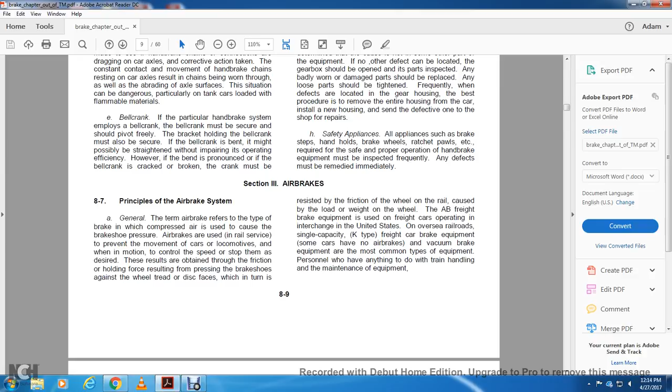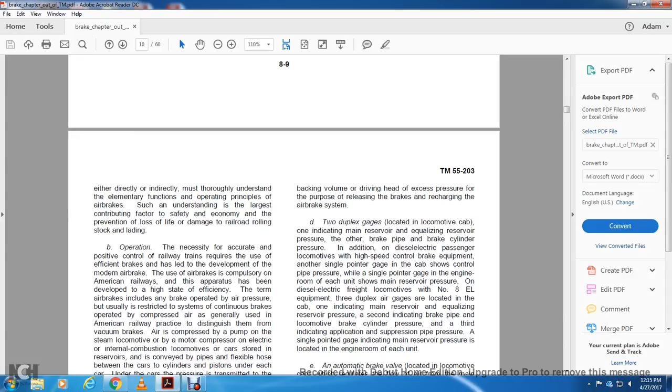Personnel who have anything to do with train handling or maintenance of the equipment, either directly or indirectly, must thoroughly understand the elementary functions and operating principles of air brakes, such understanding being the largest contribution to safety and economy, and the prevention of loss and damage to the railroad rolling stock and lading.

Operation. The necessity of accurate positive control of the railway train requires the use of efficient brakes, and has led to the development of the modern air brake. The use of air brakes is compulsory on American railways, and the apparatus has been developed to a high state of efficiency.

The term air brake includes any brake operated with air pressure, usually restricted to the continuous brake operated with compressed air, generally used in American railway practice, distinguishing them from vacuum brakes. Air is compressed by the pump on the steam locomotive, or by a motor compressor on electric and internal combustion locomotives, and stored in the reservoirs.

It is conveyed by pipes and flexible hose between the cars to the cylinders and pistons under each car. Under the car, pressure is transmitted through the brake levers, hence to the brake shoes. The brakes are applied by reducing the pressure of the brake pipe below the auxiliary reservoir, such reduction caused by the engineer opening the brake pipe to the atmosphere through the brake valve, or accidentally by a hose burst

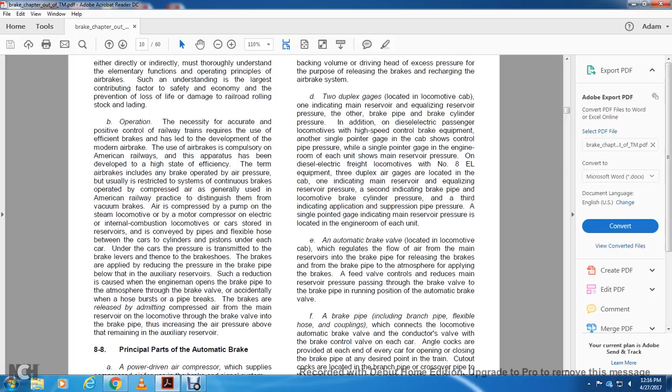of the brake pipe. The brakes are released by admitting compressed air from the main reservoir of the locomotive through the brake valve into the brake pipe, increasing the air pressure above the remaining auxiliary reservoir pressure.

8-8 Principal parts of the automatic brake. Power-driven air compressor, which supplies the compressed air for the use of the brake and signal system. The governor, which controls the compressor operation and regulates the air pressure maintained in the main reservoir.

The main reservoir serves three purposes: to receive and store compressed air, to act as a cooling chamber for the compressed air and catch basin for moisture and oil, which is passed from the compressor and precipitated from the air by cooling, and to act as a storage chamber for the excess pressure for operating air devices without interfering with the brake pipe pressure, to serve as a

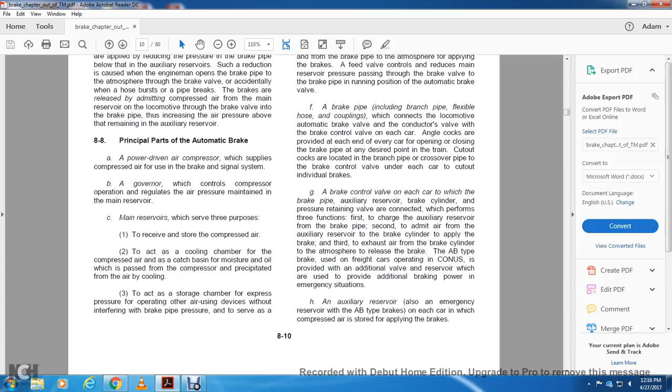backing volume with excessive pressure for the purpose of releasing the brakes and recharging the air brake system. Two duplex gauges are located in the locomotive cab, one indicating main reservoir and equalizing reservoir, and the other brake pipe and brake cylinder pressure.

In addition, with the diesel electric passenger locomotive with high-speed control brake equipment, another single-pointer gauge in the cab shows the control pipe pressure, and a single-pointer gauge in the engine room of each of the units shows the main reservoir pressure.

On diesel electric freight locomotives with the number 8 EL equipment, three duplex air gauges are located in the cab, one indicating main reservoir and equalizing reservoir pressure, and the second indicating brake pipe and locomotive brake cylinder pressure.

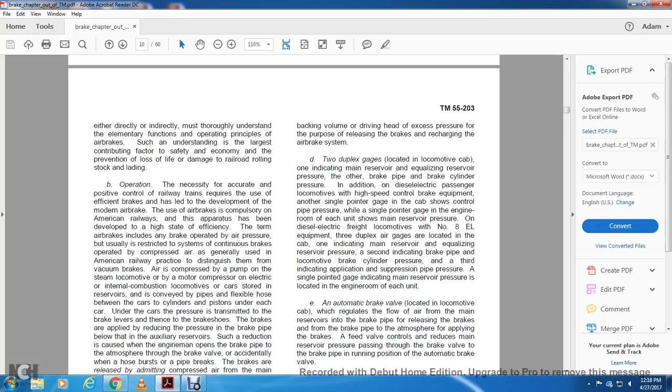The second indicating brake pipe and locomotive brake cylinder pressure. The third indicating application and suppression of brake pipe pressure. A single pointed gauge indicating main reservoir pressure is located in the engine room of each unit.

An automatic brake valve located in the locomotive cab, which regulates the flow of air from the main reservoir to the brake pipe, releasing the brakes, and from the brake pipe to atmosphere, applying the brakes. The feed valve controls the reducing of main reservoir pressure passing through the brake valve to the brake pipe in the running position. Automatic brake valve.

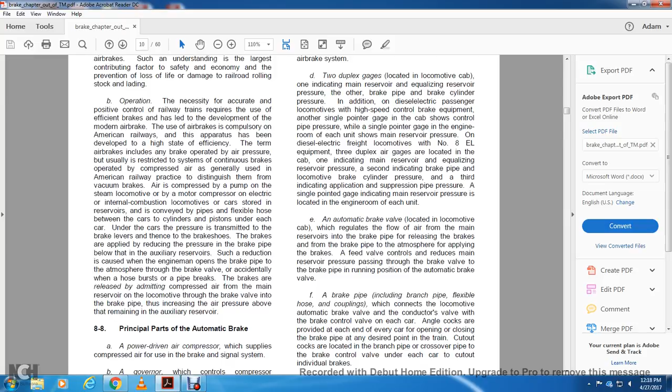F. A brake pipe, including branch pipe and flexible hose and couplings, which connects the locomotive brake valve and the conductor's valve with the brake control valve on each car. Angle cocks are provided at each end of every car to open and close the brake pipe at any desired point in the train. Cutout cocks are located in the branch pipe or crossover pipe to the brake control valve under each car to cut out individual brakes.

G. A brake control valve on each car to which the brake pipe, auxiliary reservoir, brake cylinder, and pressure retaining valve are connected, and which performs three functions: first, to charge the auxiliary reservoir from the brake pipe; second, to admit air from the auxiliary reservoir to the brake cylinder to apply the brake; third, to exhaust air from the brake cylinder to atmosphere to release the brake. The AB type of brake is used with freight cars and provided with an additional reservoir, also used to provide additional braking power in an emergency situation.

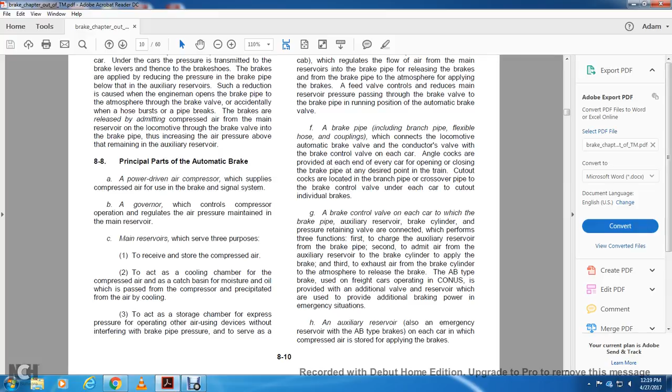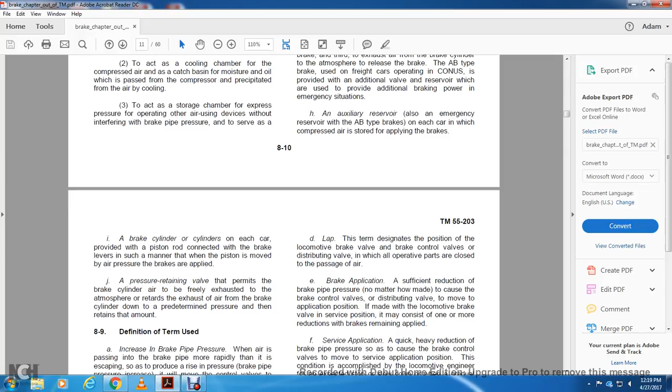H, an auxiliary reservoir, and also an emergency reservoir with the AB type brakes on each car, in which the compressed air is stored for applying the brakes. The brake cylinder on each car is provided with a piston rod connected to the brake levers in such a manner that when the piston is moved by air pressure, the brakes are applied. J, a pressure retaining valve that permits the brake cylinder air to be freely exhausted to the atmosphere, or retards the exhaust of brake cylinder air down to a predetermined pressure, then retains that amount.

Definitions of terms used. Increased brake pipe pressure: when air is passing into the brake pipe more rapidly than it is escaping, so as to produce a rise in pressure. As brake pipe pressure increases, it will move the control valve to the release position. Maintaining brake pipe pressure: when the automatic brake valve is in running position, air is being supplied to the brake pipe as fast as it can escape. The feed valve automatically supplies the brake pipe losses.

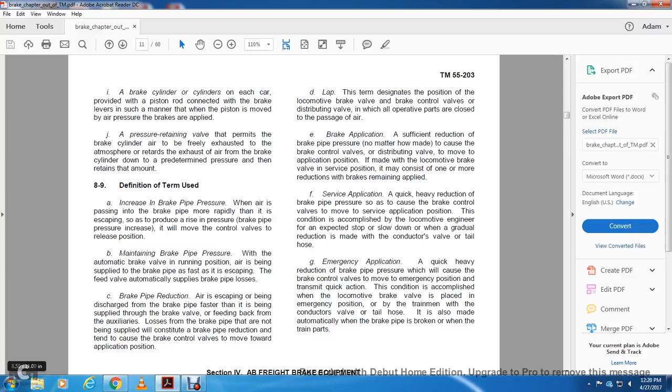Brake pipe reduction: air escaping or being discharged from the brake pipe faster than it is being supplied through the brake valve. Losses from the brake pipe that are not being supplied constitute a brake pipe reduction, tend to cause the brake control valves to move toward application position. Lap: the term designates the position of the locomotive brake valve and the brake control valves or distributing valves in which the operative parts are closed to the passage of air.

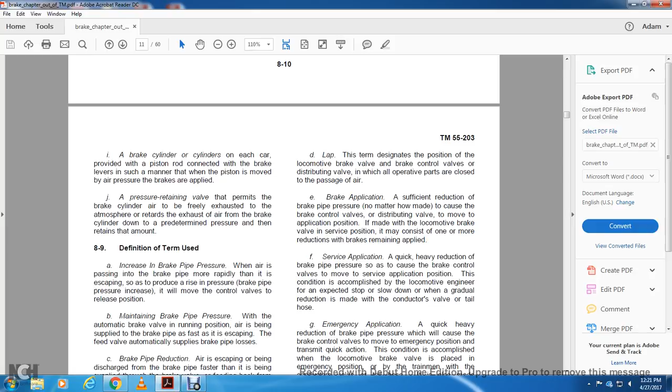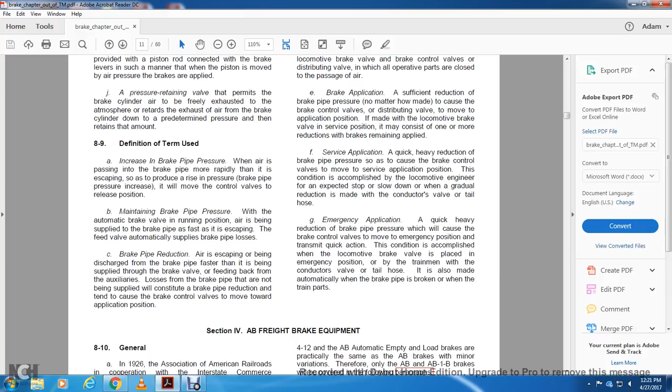Brake application: sufficient reduction of brake pipe pressure, no matter how made, to cause the brake control valves or distributing valves to move to application position. If made with the locomotive brake valve in the service position, it may consist of one or more reductions with the brakes remaining applied. Service application: a quick, heavy reduction of brake pipe pressure so as to cause the brake control valves to move to service application position. This is accomplished by the locomotive engineer for an expected stop or slow down, or by a gradual reduction made with the conductor's valve or tail hose.

Emergency application: a quick, heavy reduction of brake pipe pressure that will cause the brake control valves to move to emergency position and transmit quick action. This condition is accomplished when the locomotive brake valve is placed in the emergency position, by the trainman with the conductor's valve or tail hose, or automatically when the brake pipe is broken or when the train parts. Section 4. AB freight brake equipment.